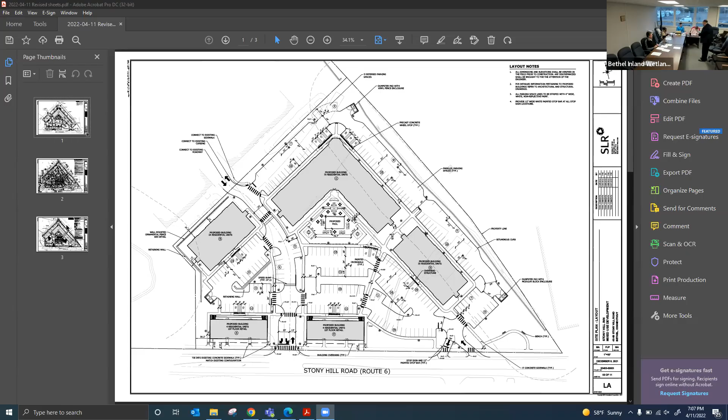Rock Emmond, associate civil engineer with SLR International Corporation. I've been here a couple times now, going back and forth with Wright Pierce on the model regarding the underground detention system.

Previously, we had 3 underground detention systems that were interconnected through a conveyance pipe and underground under-drainage. Based on conversations with Wright Pierce, it was kind of confusing how that water was actually getting from one to the next and how that was modeled. To simplify everything, we came up with the idea of just shoving it all together into one dedicated underground detention system. Because of this, we had to move a couple light poles and a couple trees.

But the actual mitigation is that we're still maintaining the same performance. We're still mitigating peak flows from the 2-year through the 100-year storm. It is still the same technical underground detention system, just consolidated into one area, with the boxes shoved together.

There's one conveyance pipe that goes across the access easement between the properties, which is what we were trying to avoid. That goes to a manhole and then to the outlet control structure, which holds our peak flows. This flat pipe, technically speaking, provides additional detention because it's in addition to the underground detention.

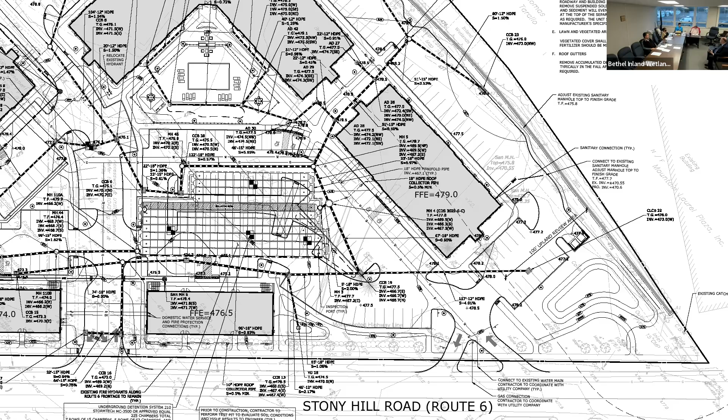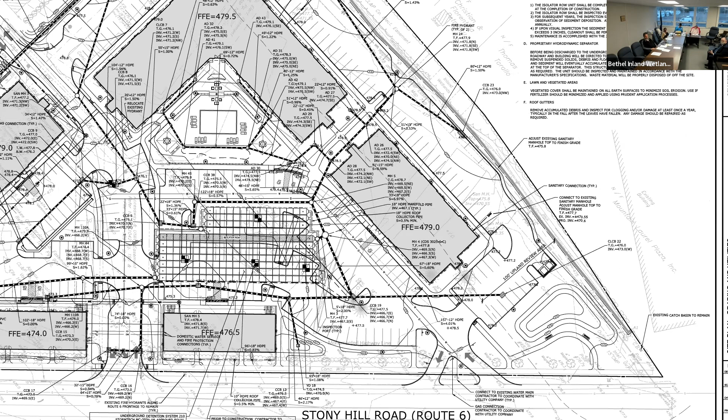Rock, can you just remind everybody where the discharge from that system goes in relation to the drainage ditch? As you know from our meetings, the drainage ditch occurs on the east side of the property. All the drainage is funneled towards the underground detention system, which then discharges to the outlet control structure, and then discharges to 2 conveyance pipes outflowing from the pond.

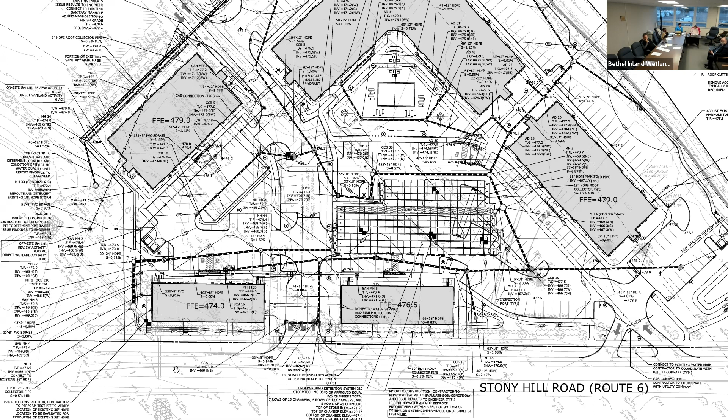As mentioned during the previous hearings, their direction of flow is being maintained, as well as the previously approved plans show the increase or the connection from the previously approved plan. This particular outlet control structure maintains that specific direction and is sized appropriately for conveyance to the concrete structure within Stony Brook or Stony Hill Road, and is then conveyed through a below grade culvert that discharges to the Dibbles Brook.

Thanks, Rock. Yep, so that's all we have. We're happy to answer commission questions, and I see some ratepayers, maybe they have comments or questions as well.

Do I have to sit there, Neil? I'm sorry, though. Yeah, but I wouldn't worry about seating anyone until we're actually in a position to have votes made. Right now we're still in just the exchange of information, for lack of better words.

Dave, do you have any questions before? Not so much questions, more so procedural comments for you guys, and also, I guess, for the applicant.

Yes, as Attorney Olson stated, the memorandum that staff received today was, I'm hoping, the last in a long continued volley of exchanges of comments between Mr. Iman from SLR and our consulting engineers over at Wright Pierce. I think it's worth noting that some of the items the applicant is looking for you guys to address as conditions of approval have remained outstanding since you accepted this application. So it's worth having you guys discuss how we would word those conditions to make sure those items get addressed before any construction takes place.

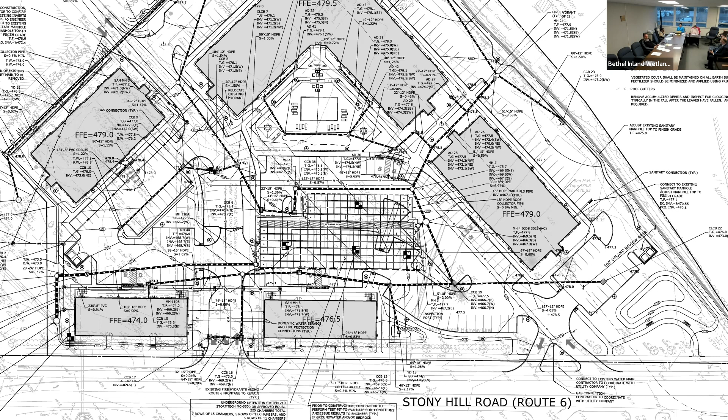We don't actually anticipate, due to best management practices such as the water quality unit and the deep sumps, or just the infiltration row in general, that there's going to be that much sediment collected. But it's nice, it's necessary, and it adds for more variety in maintenance.

So how long does the water stay there? Depending upon what storm actually occurs, we're planning on the 100-year storm, which depending upon the infiltration rates, could take upwards of 72 hours maximum.

So is it going to naturally flush out with more water? It's not going to flush out, it's not pumped out. It's either going to be infiltrating into the surrounding soils, if they are good soil, or it's going to be discharging through the outlet control structure and funneling out towards the connection that comes from the pond that goes to Dibbles Brook.

All right, let me see if I have this right. The water's going to go in there, it's going to hang out there for a bit. And that's what we're calling mitigating peak flows.

So when you increase the amount of impervious surface in an area, that's increasing the rate at which stormwater runoff occurs. So the detention is really holding that water in, like in jail, and then allowing it to trickle out. And hopefully, if you design it correctly, you're matching the pre-existing flows, which our drainage report shows we're showing a slight decrease to those flows.

So theoretically, it's not really going into Dibbles Brook, it should be dissipating out. It should just be spitting it out slowly, but meeting the previous flows.

So if there was, let's say, one CFS that was originally going to Dibbles Brook, we're showing either 0.9 or 1 - there's still that amount of water going there, because you don't want to inundate or take water away from it, since it still needs water to go there. Right, okay, thank you, I appreciate that. Not a problem.

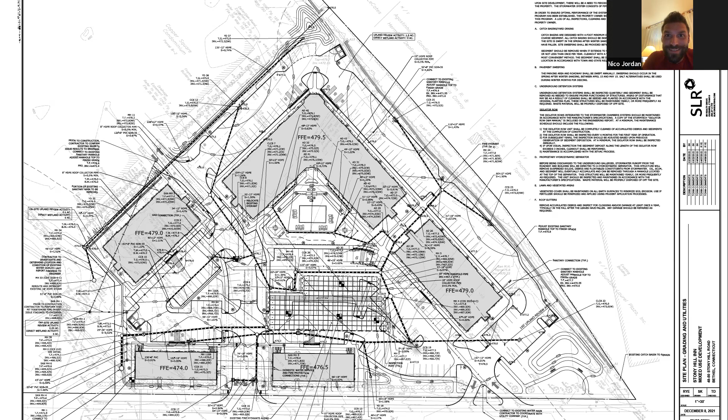The only comment I have, I guess, is just more of a concern for the water quality on the outflow to Dibbles Brook. I don't know if Rock, if you can comment on the quality of the pollutants and the salt content, maybe.

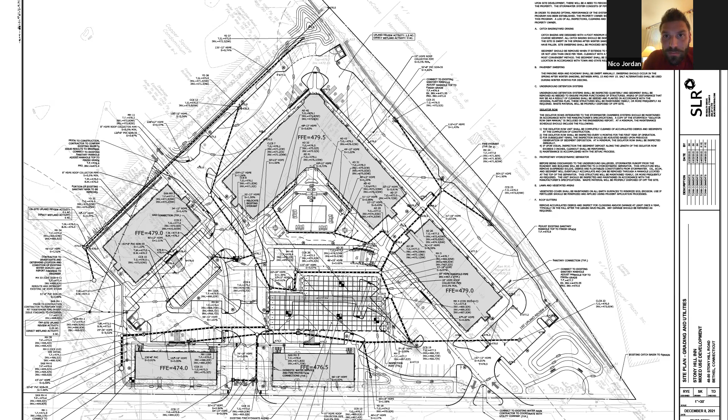So this goes back into the previous meeting as well. The way that we're actually operating the underground detention system, we're both mitigating peak flows as well as providing 1 inch of water quality retention. The water quality retention is handling that first flush, which is handling it both with a water quality unit, which is taking out 80% of the total suspended solids, as well as the isolator row, which I have thoroughly addressed.

Those are actually taking out all the pollutants that you would normally see from just regular sheet flow across a parking lot, or that you would see just ipso facto on a roadway from being salted. So as it pertains to water quality, water coming out of the development is going to be cleaner than it would be if it was not treated. Currently, under existing conditions, as this is both a redevelopment as well as it was originally designed to handle some development of this sort, we are both exceeding as well as mitigating those with best management practices.

That I've just alluded to. Nico, may I embellish your question before you continue? Sure, if you'd like, yeah. Okay, I think, if I'm not mistaken, I think what you're trying to touch on are the methods of treatment, and I think Rock may have spoken to one of those. If I'm not mistaken, there are two separator elements also installed as part of the stormwater management system. Am I correct?

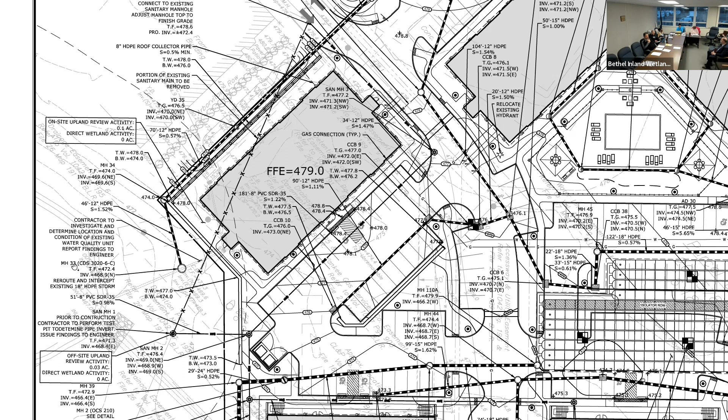So it is sized appropriately for the development at that time. Because we are actually taking water out of that, it's going to provide additional water quality flow, because based on the unit, it increases the size as well as the water quality flow that's going through it. Because we're taking water out, there's still that threshold that's being met, and we're still mitigating it with our own on-site water quality unit.

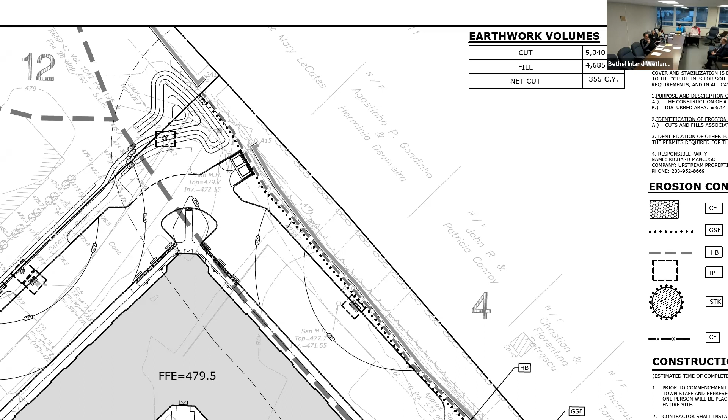The CDS 3020-6-C, yes. And from my own understanding, does that have a hydrodynamic component? That is a yes, hydrodynamic thing. So maybe that's the term I wasn't exactly using. Yes, the water quality unit and the hydrodynamic separator are one and the same. So apologies for the nomenclature. No, that's okay, I just wanted to make sure that element had remained or hadn't. Yep, it has remained, and it's also part of the drainage report that has been reviewed by Wright Pierce. Very good, thank you.

Sorry, Rob, Miguel, just to finish, may I? Yep, go right ahead. Does the hydrodynamic separator take out dissolved solids, like salt? It takes down what's considered the 80% total suspended solids, and those whip around and settle out to the bottom. There's a maintenance program within this document that shows that every couple of years or every 6 months, that'll be cleaned out.

Now, as it pertains to dissolvents, those will settle out inside the detention system as the amount of water increases. It's going to dissipate, dissolve, and eventually either evaporate or just be held and not really go anywhere. So when they actually come with the vac truck, it'll all be within the isolator row, depending on what it actually is. So hopefully it would settle out and then be taken and trucked off.

Okay, so do you think that, considering the best management practices you're employing in this project, that the water quality will be better than the previous outflow to Dibblesbrook? That's the goal, right? I would stand by that 110%. We're trying, even though you're developing all these impervious surfaces and increased parking area, which is going to be salted and added on to with the human use that it gets, that somehow with the construction you're building, are you able to improve the water quality outflow from the existing site to the brook?

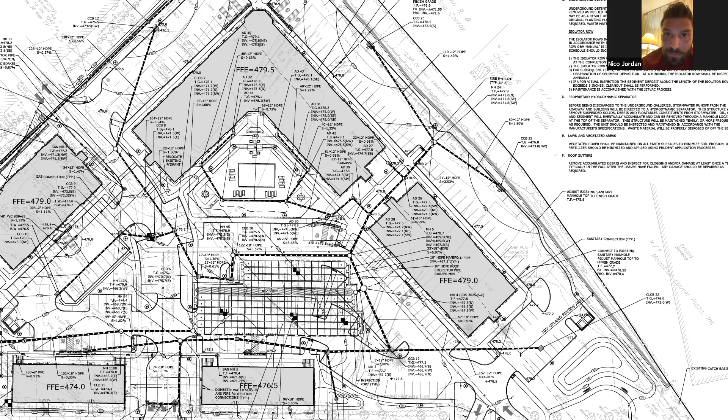That's a huge task. Yes. With the best management practices that we're employing with this project, in my professional opinion, yes. Good, because that's the goal. Is that the goal? That is the goal. That's always the goal of what we're doing here. All right, any other questions, Nico? No, that's it. Thanks. Awesome.

Is anyone from the public here who wishes to speak in regards to this application? I do see someone in the waiting room. Area code 203-482-6410, can you identify yourself? Okay, so I will just say, for the persons out on Zoom attending this meeting virtually that want to offer comment, I believe it's pound 9 or 9 star that you hit. That'll let us know you have a comment to offer, and that raises your hand. I don't see anyone doing that at this time.

So I would say there's no comment. Okay, nothing further from us. Okay, just—

We've spent a lot of time going through this plan. Maybe I should remind you that if we go back to the beginning, we had an approval from 2013 for essentially the same project, and a significant amount of it has been constructed. The property itself is highly disturbed, paved, with former buildings and parking areas and everything else on it. So we definitely believe we're improving the conditions that are out there. Hopefully, when we get this built, we'll bring closure to what's kind of an eyesore at this point.

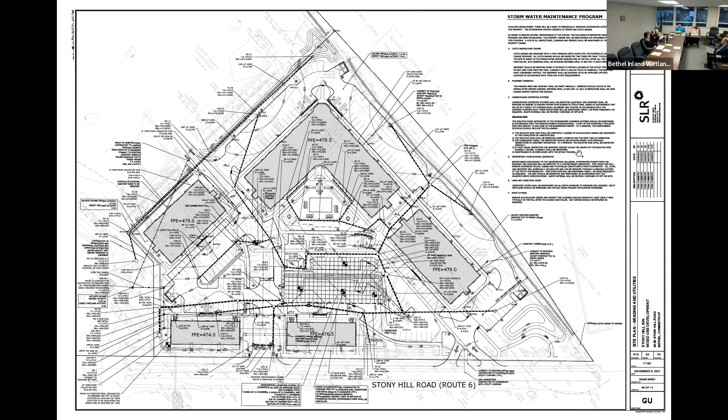I would have you add that Danielle was seated for either Greg or Laura. That choice is at your discretion. Okay, seating Danielle in place of Greg for this evening. Thank you.

Do I have to make a motion to add this to discuss at the end of the meeting? Yeah, if you want to, I would have you or the commission make a motion to add 48-50 Stony Hill Road on the agenda under new business.

I make a motion to add 48-50 Stony Hill Road at the end for new business. I'll second that. All in favor, signify by saying aye. All against, abstaining? Okay.

Next on the agenda, we got Plum Street Road number 49. Is there anyone here for or online for Plum Street? This is a public hearing. Marius Jedrzejkowski from Wright Pierce. Hello, everybody. How are you doing? Good.

Last time we met, we received some comments from Dan McCollum regarding our applications. That was on March 25th. We responded to those comments on March 28th and sent them back to Mr. McCollum, and hopefully he had a chance to review them. Also, one outstanding item was the response from the Connecticut DEP regarding the NDDB determination for the site, which we received on April 1st, 2022, and that was provided to Mr. McCollum for his files.

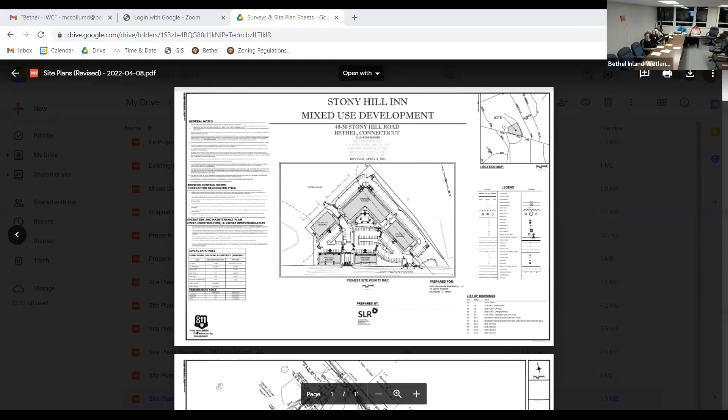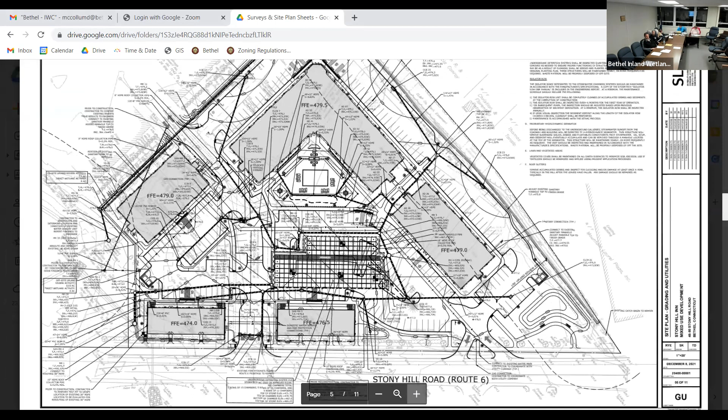So there's the existing conditions, that's what the site plan looks like. Do you have a planting sheet? Yes, I'm trying to find that for you here, just bear with me. See, there's the sheets. That's your sediment and erosion control, these are details. I do know they have a sheet that specifies landscaping.

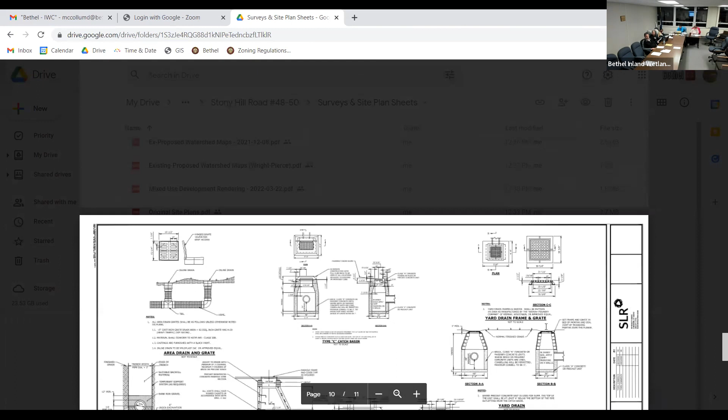Of course, it would help if the computer would work. I'll just go down, unless it's this sheet, the one that's not visible at the moment. Just so we can make sure there's plantings there, to act as a buffer. Which side are you speaking of? The right hand side, if you're looking at the property. I don't know if that's north, along the drainage ditch. Yes, along the north side, drainage ditch. No, that's not the one.

And do we know if they were gonna plant native plants there, or what kind of plants they're planting? We didn't specify. Invasive Barberry. Yeah, great, that's what I thought.

Okay, so while I'm looking for these site plan sheets that'll actually work, what would the intent of these plantings be? What function are you looking for them to perform? To keep things out of the wetland, be it trash and or people.

Okay, so this is litter control and traffic control, people traffic. Like low bush, that type of thing, with lots of thorns. There you go, I mean, you don't want to leave the orange fence there the whole time. So here it is, I would, but it may not blend in too well.

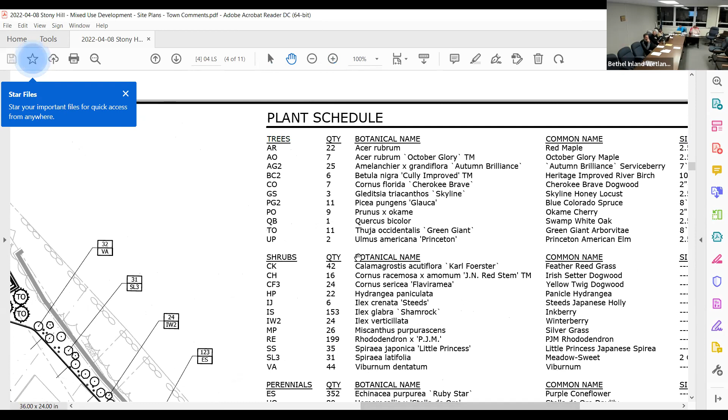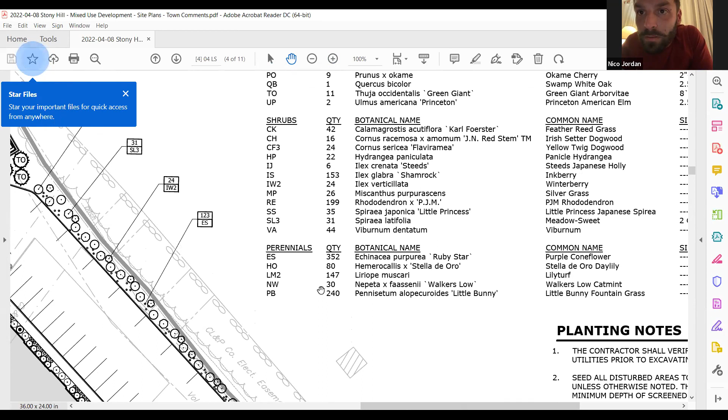Oh, yeah, I knew it. So they have a whole plant schedule, beautiful, dedicated to what they will be planting along the edge of this parking lot area, between the curb and the limits of the intermittent water course there. Great, and the only thing I recognize is rhododendron, so. There's some dogwood trees in there too. Hydrangeas, holly.

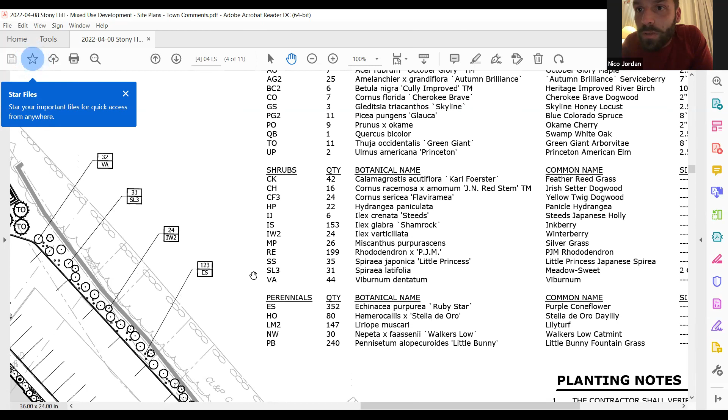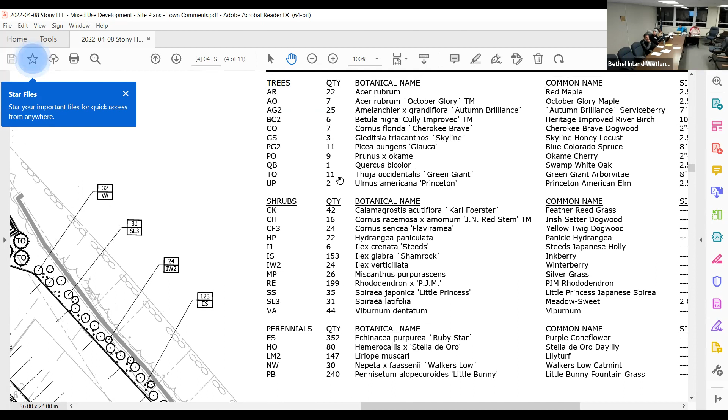Perennial, shrub. So if I'm following the nomenclature for this correctly, you would go by the names and the numbers. So for instance, 32 VA would be, if I can find that here, it's quantities.

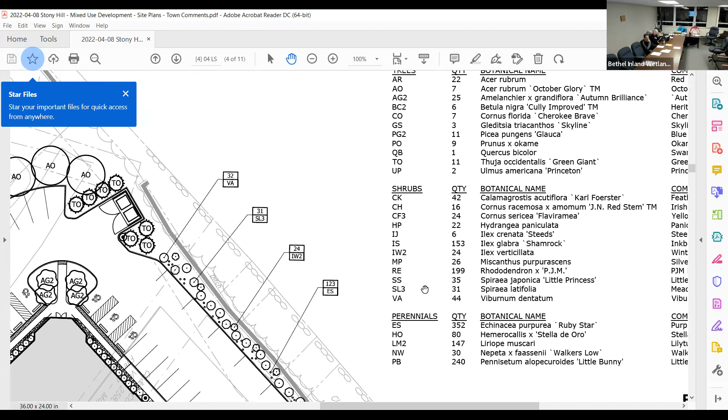Oh yes, okay, that does make sense. So I was going to say, the legend quantity. I see a VA but I didn't see... Okay, so that would be your viburnum dentatum, which is just a viburnum. And then your IW2 would be winterberry, and so on and so forth.

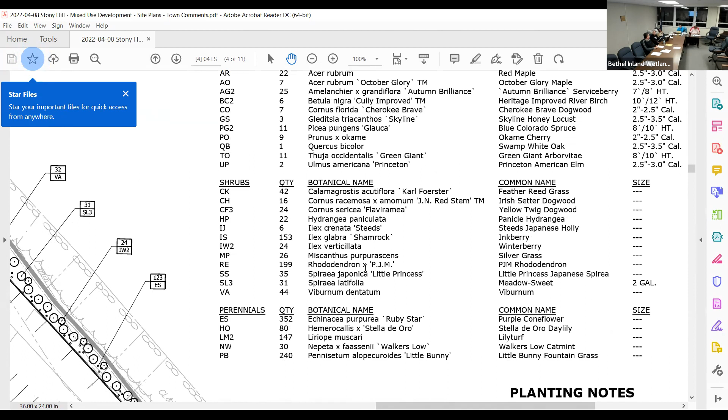Okay, yeah, we don't have to go through each of those. No, that's good. I wouldn't suggest it, I wouldn't know what they are doing anyway. This is great. But I understand what you're trying to do, you're trying to mitigate most anything from the...

You know what viburnums are? They're beautiful bushes with white flowers. They look like hydrangeas almost, but they bunch.

We need a landscaping like this in my yard, this is cool. My only question would be, I'm just curious what percentage of the plantings here are considered native to our region, but I don't know if Rock could come up with that. It's not here anymore, I don't think we could ask.

So that's a question you would have had to have asked during the public hearing. I can calculate it myself though.

That being said, it looks like a lot are native. I'm just curious about the percentage. They usually do mostly, if not all, native. We encourage the use of native species for planting plans, Nico.

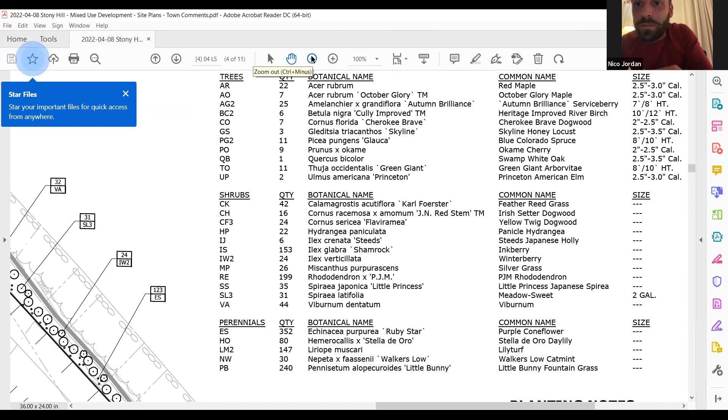I'm guessing it's cool. Japanese holly might not be native, just going out on a limb there. Yeah, some are not. I'm not familiar with the whole area, but of the ones that I can identify, I don't see anything that I've noted as invasive or problematic.

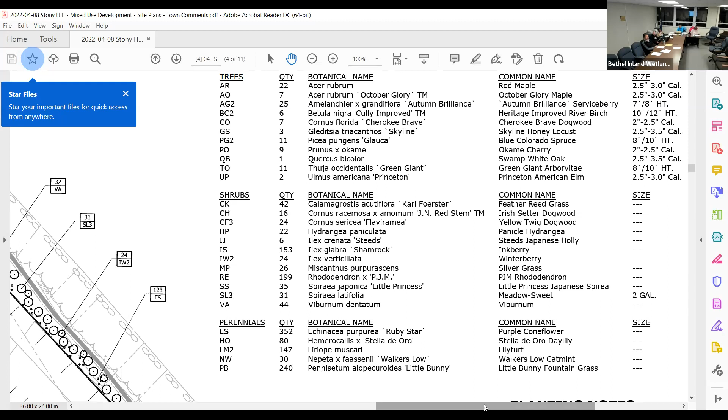Maybe the catmint, that kind of plant goes nuts, but otherwise no. That's a good observation, Danielle. Thank you, I'm glad you're here.

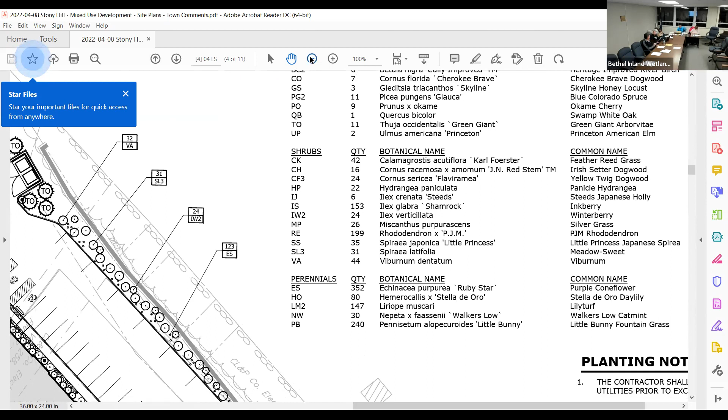All right, that's all the stipulations that I see. I think everything else was fine, but I don't know if anyone else has... Okay, stipulations. And Pat, just as an embellishment for you, you were talking about the dumpster enclosure before.

So it does look like they are proposing plantings in its immediate vicinity, if this is in fact where the dumpster is. Isn't it enclosed? Isn't the back of it enclosed? Just want to make sure. So it has 3 permanent sides, and then it looks like these are meant to be doors that are opened for trash removal.

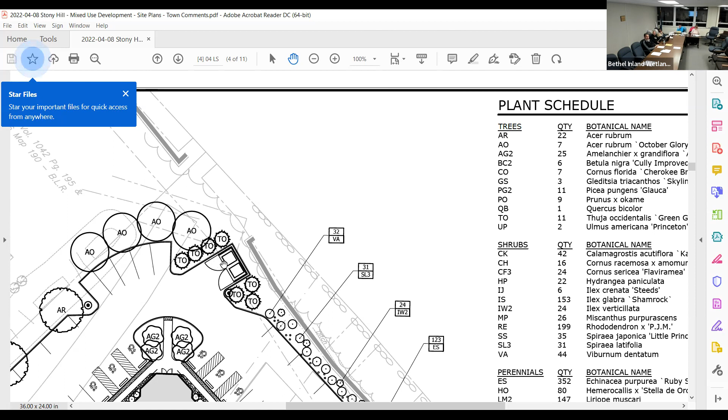They'll break in about a year. Yep, you can give them that one. I mean, obviously you have to have some way for... no, absolutely. Okay, no, okay, that's perfect.

At least the permanent sides are facing the area that we want protected. And then the same would go for what would appear to be another enclosure where my cursor is, down at the bottom of the page, if everybody can see that. There's actually 3 - there's one all the way to the left as well, in the bottom corner. Oh yes, over here, and that's enclosed too. Okay, any other questions?

Not for me. Okay Nico, any stipulations? Oh, it's gonna be pretty cool, I think actually. But I'm looking forward to seeing how it all turns out, I guess.

Okay, so if I have a consensus from the commission, and I would have you all give me an affirmative to do that - to craft a draft resolution of approval for the 25th. Yes, please. Yes, please. You agree, Nico, with that? Same goes for you. Yeah. Okay, very good, then I will do that.

Okay, let's move on to Plum Trees Road. Now for this one, I believe, in acting on your request from the last meeting, I do have a draft resolution of approval ready to go, and I will distribute that to you guys momentarily if I can. There it is.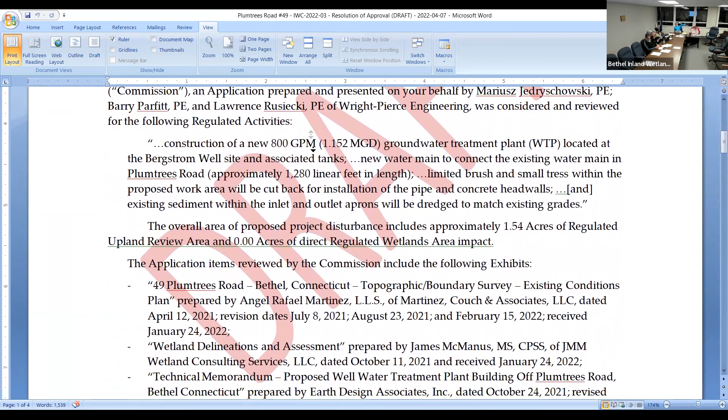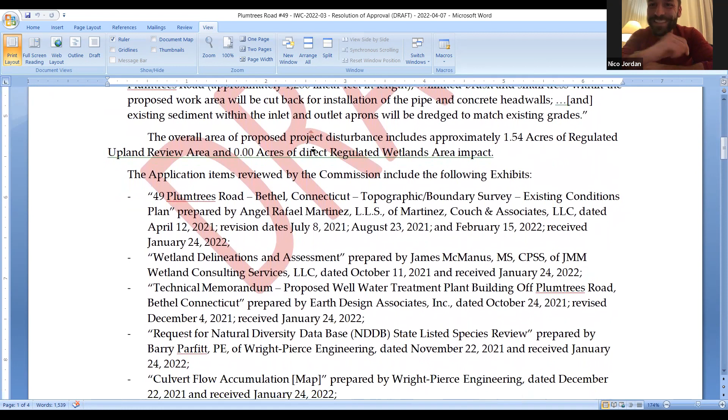Okay, good, all right, so I'll let that scroll. You guys can read, I'll be back in a minute. Bringing coffee, Dave? I don't have a pot brewing, I'm sorry. You could set that to do that. He's very fancy, yes, it's the Star Wars function. Is that really- Yes, it is. So I was just thinking, man, I could do my meetings with that. No, because it would walk away, it gets smaller and smaller. Get my attention there. I'll be right back, okay? Thanks, Dave.

Dun dun dun dun dun dun dun dun. Sorry, can you walk me down too?

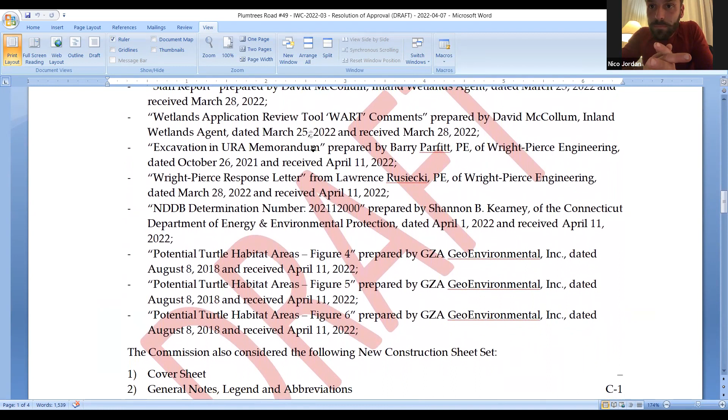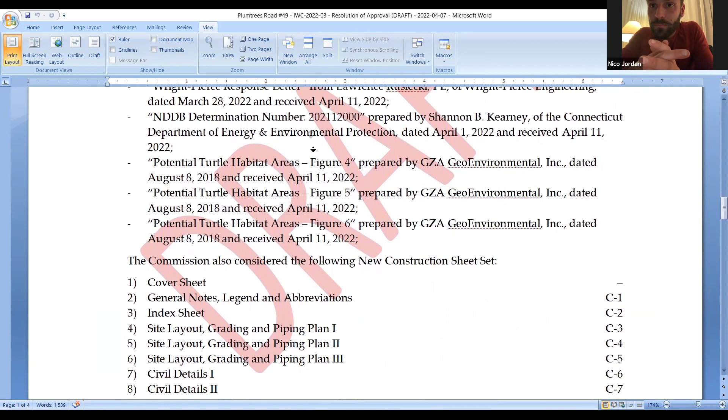Click here, yeah, it's cool viewing tools. And then it's frozen and it's saying, can you get out? You have to call us. You use your computer and just can't get out. Yeah, or it's like exit out. Rather than exit, you click so.

So if you task manager force exit. You did a couple years ago, when that was really bad. Yeah, where you just lock your hard drive and.

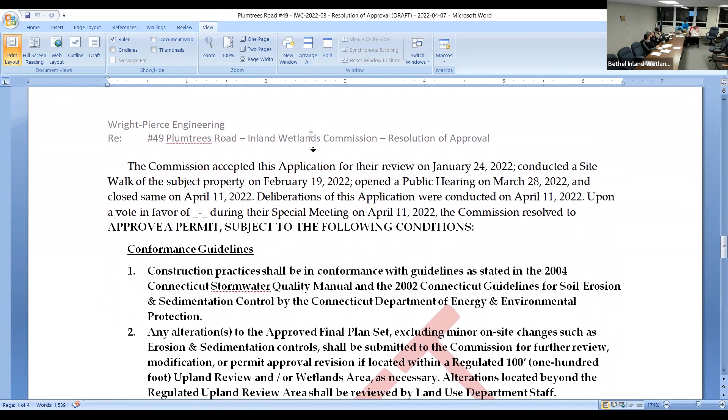Good. Maybe, okay, but I'm the newbie, so I could be wrong. Shit, okay, I'm the old one, I didn't find anything, so. I thought I would, should the turtle person be in here?

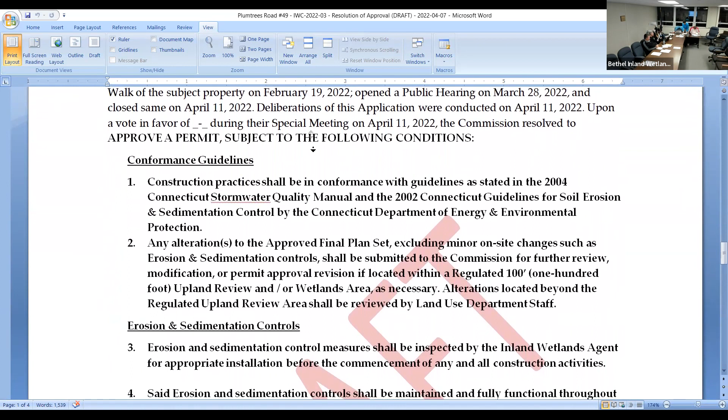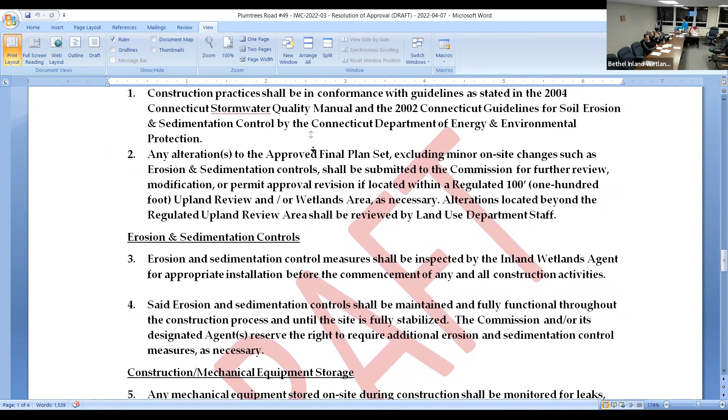Very good, how many points did I get? Infinite brownie points, you know what my prize is? I'm a seated member tonight. Hey. You have a low bar. I do, I do, it's true. That's a gift. No, well, if I have to sit here, at least it's nice to be able to vote.

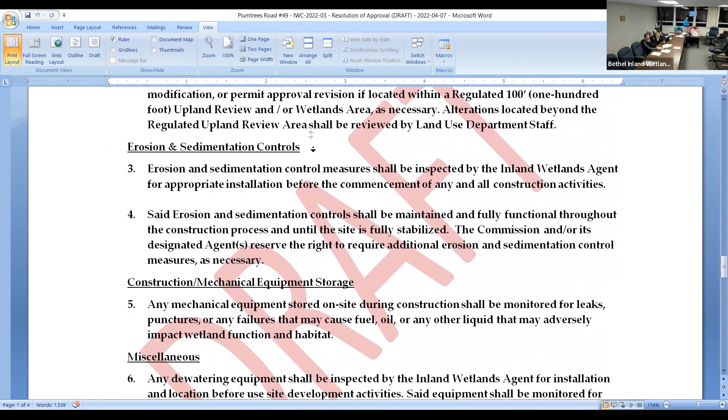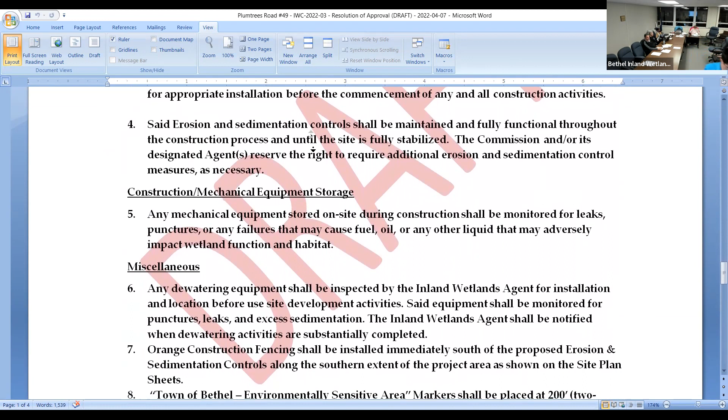It went to Wells Fargo, California. Let's get your representative. No big deal, glad I contributed that. I don't really know how important of a thing that is. It was like, because California is 3 hours behind us, they don't do it. This poor woman would have lost $400,000.

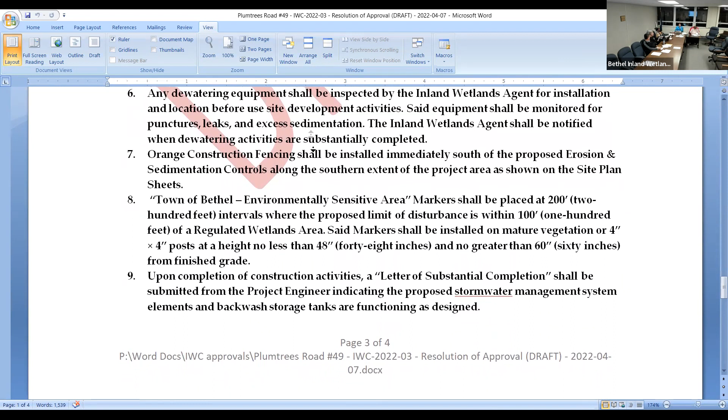No, I thought I read fast until I- No, the first 2 pages are boilerplate, pretty much, yeah, you just skim through, pretty much.

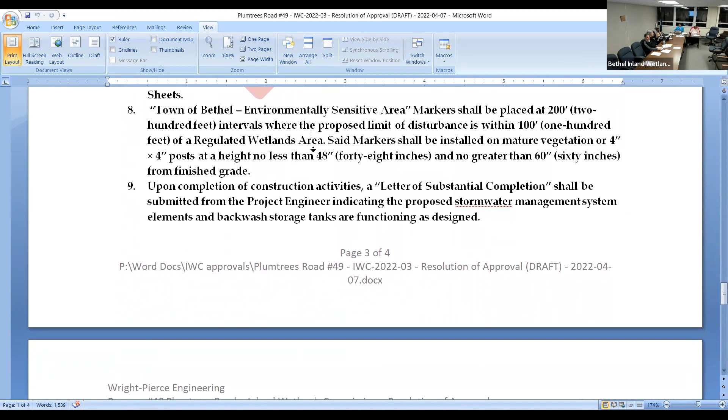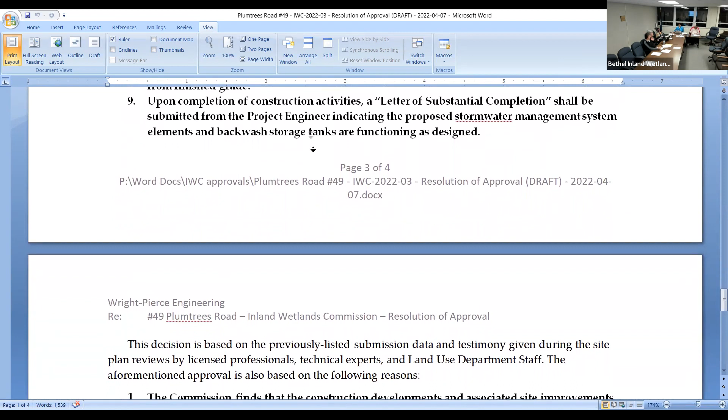Oh, you got the orange construction. That's it. Hey, I found that, I'm good. I saw that, I was like, that's the past clause. That's the fact clause. Actually, I didn't start that, so the previous member started that. Yeah, it is now yours. I think that's a tribute, as an aside, that's a tribute to our former chair.

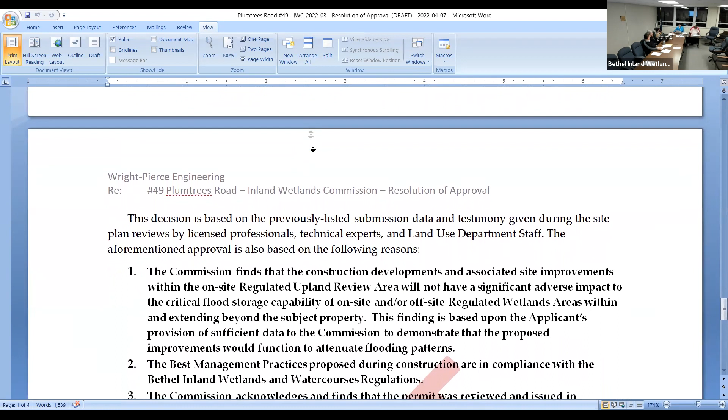Was there supposed to be something here about the culvert that runs through? Yes, and that would have been the location of orange construction fencing. That's another one I also didn't think of, thank you. So I'll have to modify that condition to include those sections.

Got it. Nico, you good? Want to read backwards? A long time ago in a galaxy far, far away. I can't believe I remembered that, to be completely honest.

All right, I'll just go over for everybody what you all read on the screen. So as Pat mentioned, the first two pages are really boilerplate. They describe what it is that is before you guys, which is the construction of a new 1.152 MGD groundwater treatment plant located at the Berkshire well site and associated tanks.

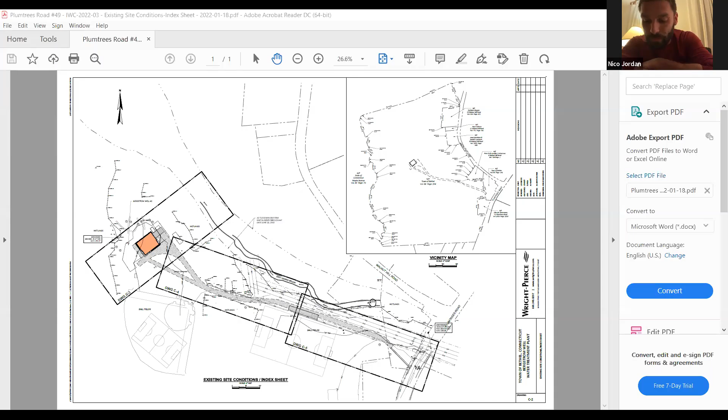It doesn't have to be every tree. If you have a tree at 150 feet, that's fine, or 210, that's fine. You could make it a range, like 150 to 200 feet, as nature provides, at natural intervals, depending on what the site kind of asks for, if that makes sense.

I like it. Can we get some tinsel? I like tinsel.

Let's work this from the entrance off of Plumtrees Road to ultimately where the Bergstrom well pump station would be. So this is your existing driveway entrance here, right? You would have them installed to the effect of, because they're going to be putting the water main in to get to Plumtrees Road, so my thought process would be you would have them installed along the edge of where that cleared area is.

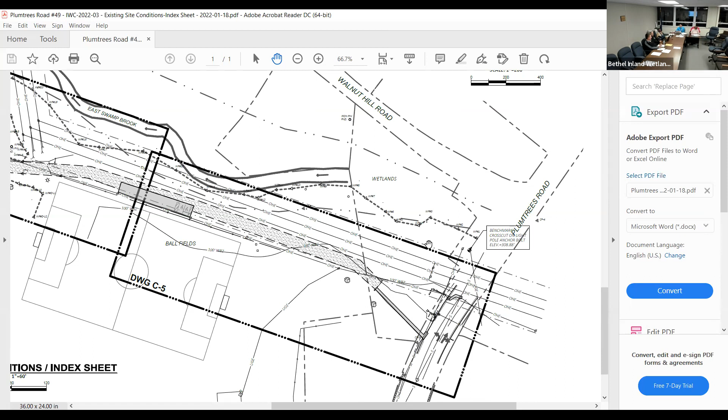As long as it's not in the middle of it. No, as long as it's right on the edge, we're good. That would be the thought process, and then you would have that extend all the way down to the back of the pump house here.

This is where people are going to be spending an extended period of time, either getting ready for games or socializing before and after, so most of the hanging out with strollers and bottles occurs in front of the pump station. So this would be where it would be most important to have a visual indicator for people, I would say. So if you're comfortable with that interval and think it serves its purpose, that's what my intent had been with crafting it that way.

That's fine. And if for some reason the contractor, when they look at this resolution of approval, doesn't get it, I'd reach out and show them what I need. That's fine, and I'll show you guys what the intent is.

Is there existing mature vegetation along the driveway on that side? Not really, it's mainly just reeds. Right, so that's the thing you may have to meet with your 4x4, because if you have phragmites there, that obviously wouldn't work. So that's where having the posts would make sense, and I would only have those used as a backup. Does that make sense?

Yep, it does. One other thing, I just noticed from the recommendation sheet there's no indication as to depth below ground level for the fencing, it just says to ground level, 20 inches high to ground level. That was my concern, was digging, turtles dig under, so it'd be very easy to get them in. I don't know if we're able to make it a stipulation that they go at least an adequate depth below ground.

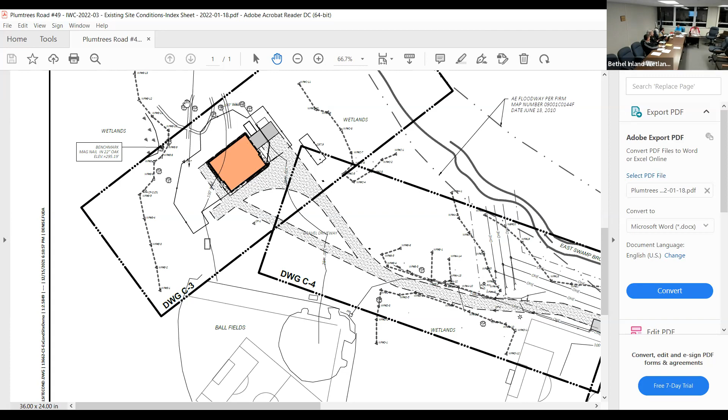Deep. Amend construction fence orange to include culverts. And then I have to add in the APA regulations section.

Okay, anything else I missed, guys? Nope, not for me. Nico, you good? I should have been writing while I was - yep, I can't multitask that well. So I would say you have... oh yeah, you know what, let's just put that as a second one.

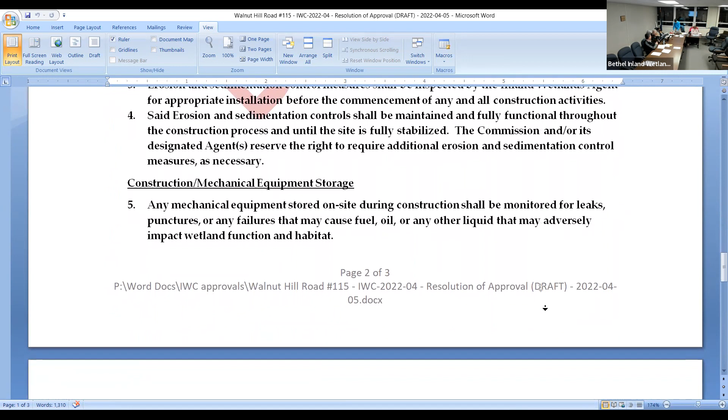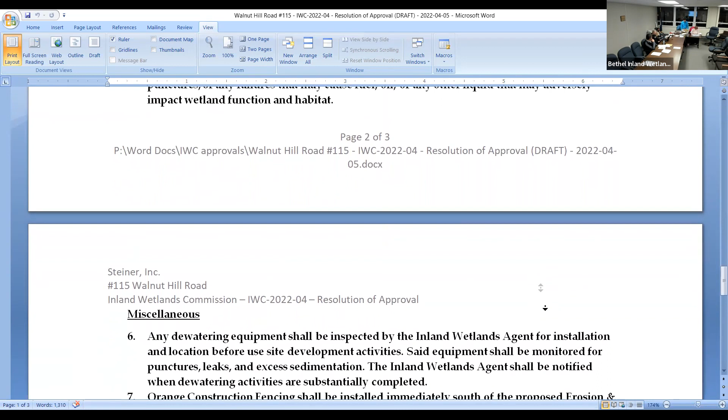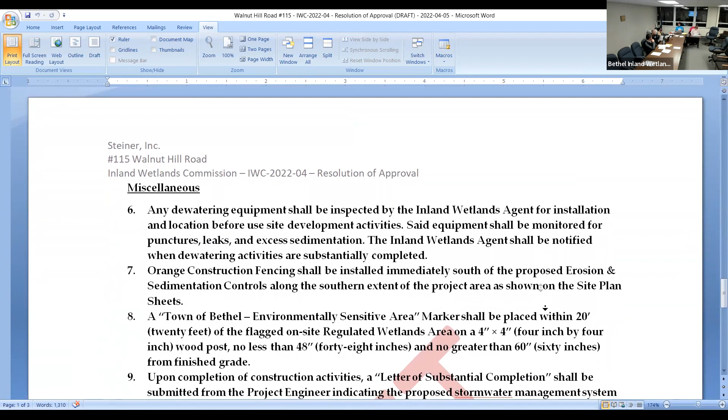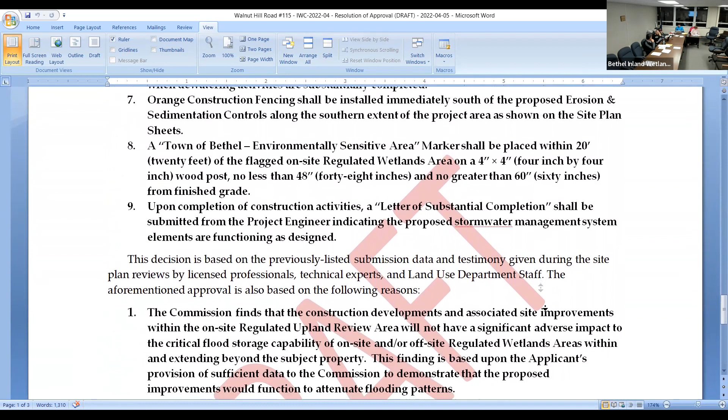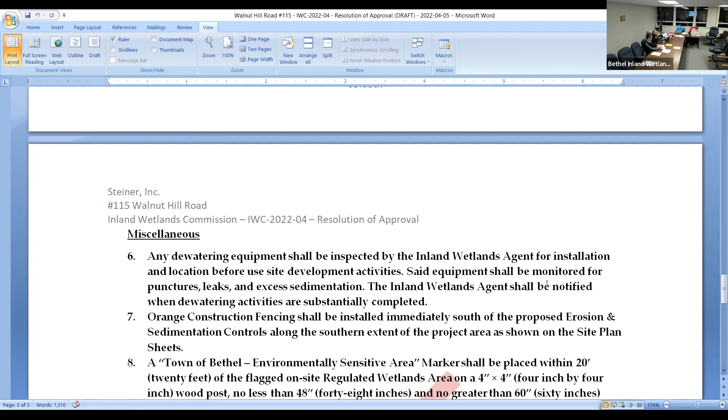Okay, so if you guys haven't already surmised, a lot of what was written in the approval that you just saw and approvals you've previously seen are here again. Of course there are tweaks I need to make, the obvious ones being adding a blurb about the aquifer protection regulations. You guys are rendering a decision in consideration to those, because this also falls in an aquifer protection area. And then the other item being the markers again. So obviously we would not have.

Okay, so I did read it the same way. So if you guys are comfortable with having just one, or if you guys feel it's not appropriate to have any, I leave the decision to you. We can strike that, I think one is fine. You're not telling where to put it, they could put it on the side, they could put it in the middle. It's within 20 feet of the regulated wetlands. So you're not telling them to put it in your view. I mean they literally can have it to the side. Okay, I'm fine with that.

It says placed on a post. I don't know if you want to be on mature vegetation. Mature vegetation, okay, is that okay? That's if there's a very good freestanding tree right where they can plug it, if you guys feel that's appropriate we can certainly modify that condition for that. I mean I would like to add that, would you guys care? No, that's perfect, yeah I agree. Okay, no I think that's fine. So let me.

And you can change it to a minimum of one, because if they want to put more than one, that's fine. Yeah that's true, if they wanna put more than one we shouldn't tell them not to. No, you guys shouldn't discourage them. I would add that there's no cost for these markers either, because they may go on the other side and put some of their own woods there, so. Okay, a minimum of one, that works.

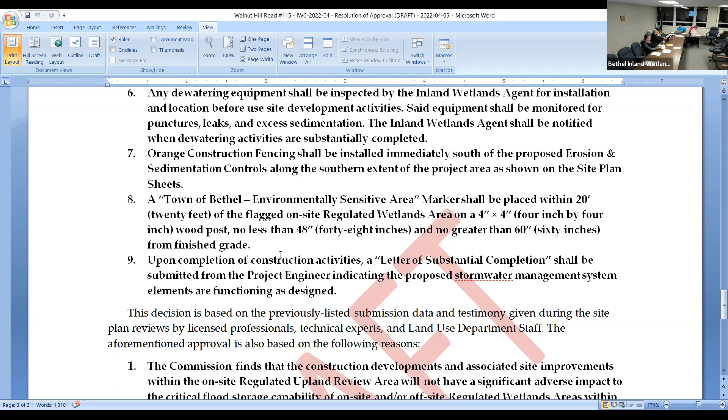Okay, and reasons for decision are pretty straightforward as well. They are the same ones you guys used for the previous application. I can modify these as you see fit, unless you don't think any modifications are needed. I don't see any. Okay, cool.

So we just need a motion? Yes, would you like to do the honors? I'd rather have someone else do the motions. I make a motion to approve the draft resolution of approval for 115 Walnut Hill Road with the 9 stipulations as mentioned, with the amendment to number 8 as discussed this evening, alongside the 3...

And these conditions of approval are based on the findings as listed 1 through 3 on page 3 of the draft approval.

Yes, and we have a second. Second. All those in favor, signify by saying aye. Aye. Aye. Against? We need an aye from you too. He's got thumbs up, okay, aye. Thank you. Abstaining? Motion carries. Okay, very good, and we're on to the next one.

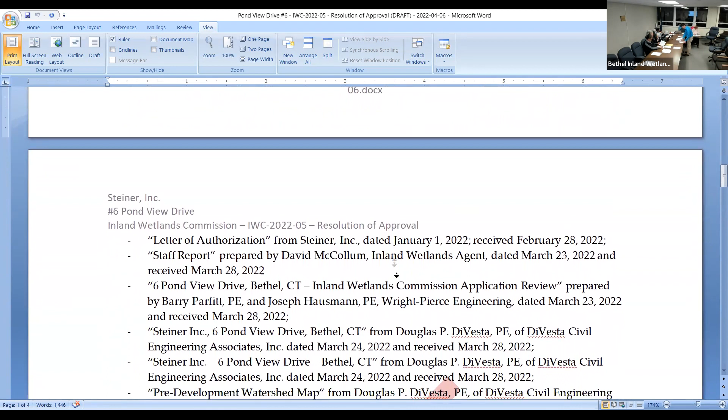Just change the letterhead on this one, Dave? Some of the nitty gritty it takes, yeah, it doesn't seem like it's obvious, but there's a lot more that gets changed than meets the eye. I'm sure, the whole first couple of pages, I don't know how you track it all.

We're done here. Let me tell you a funny story about not editing documents like that.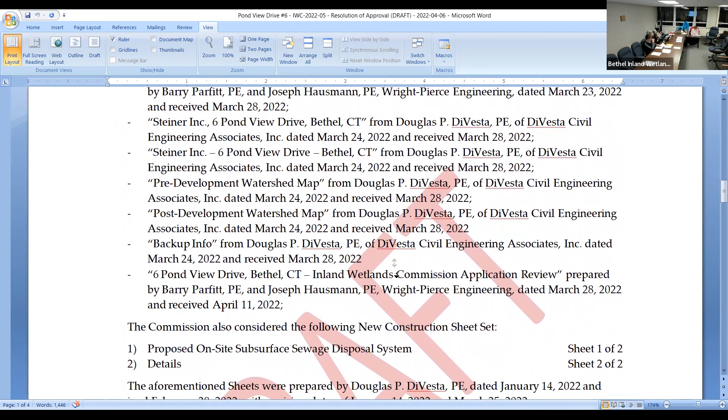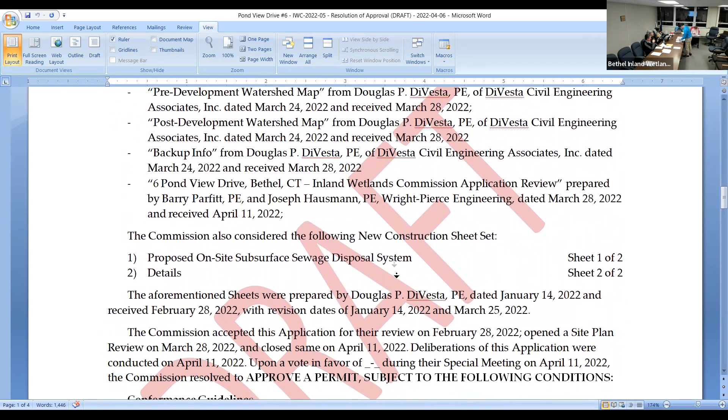If they could put this on a Bethel marker on their front door.

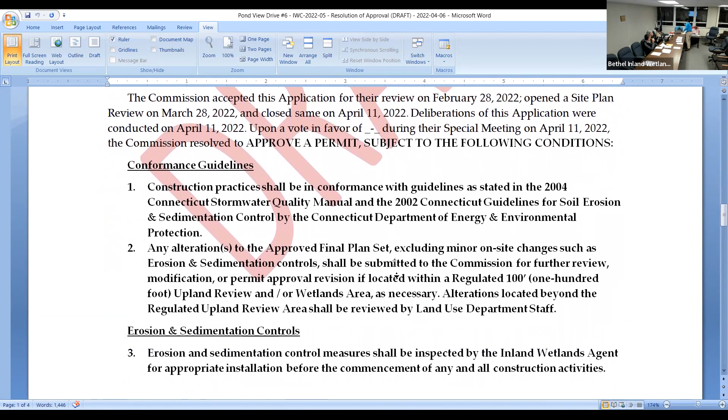If they're fishing that pond and they catch something, I'm gonna be really upset, so I wasn't gonna fish in that for 2 years. No bites? Nothing really, but we've seen them though, we've seen them in there.

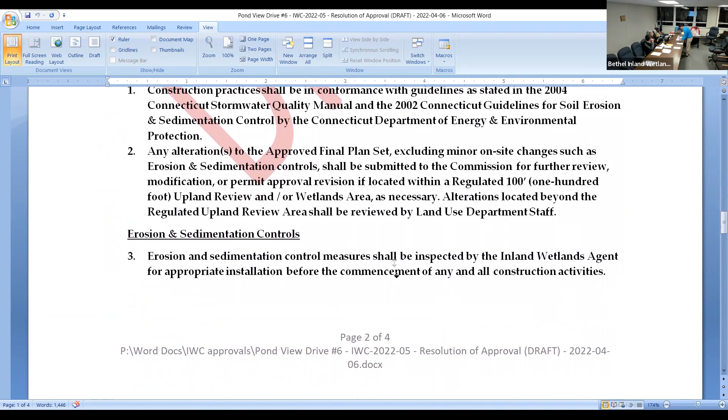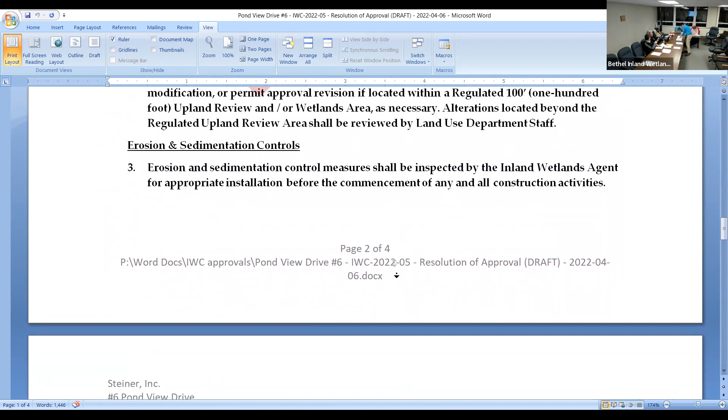My brother has a homemade pond. It's good, you can do a canoe on it. It's huge, and people come fishing all the time, only catch and release, unless it's some type of fish that's like this big, that's not crappie, usually. Yeah, but they can take the rest, they just got some big fish in there. Well, you don't wanna eat largemouth anyways. Oh, I don't know, well, I mean you can, but they taste like garbage fish. Largemouth and smallmouth, they just have a weird taste to them because their diet is so wide, it's like a wide array of food they eat.

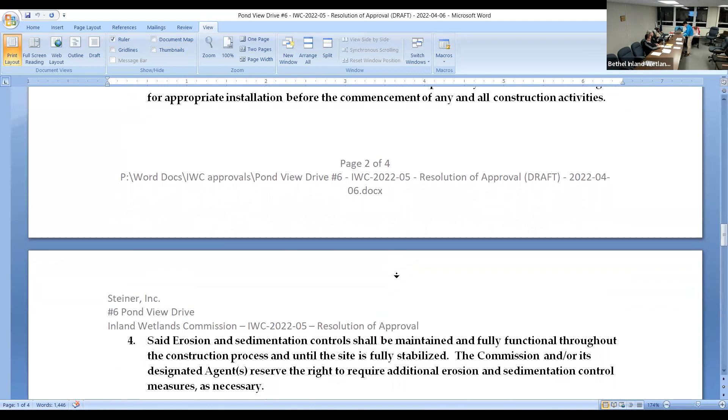Yeah, really, for fish I think deep sea fishing, that's it.

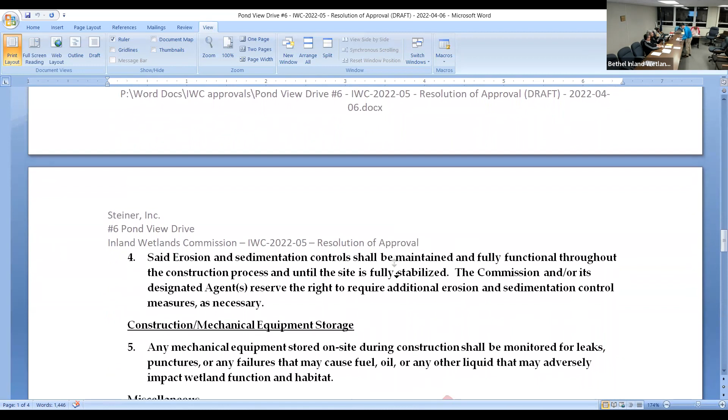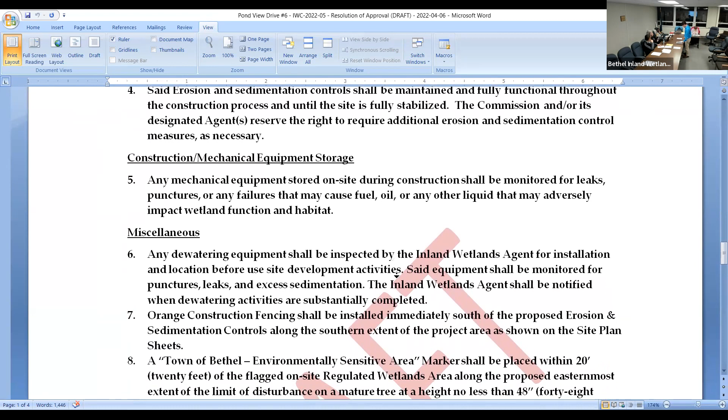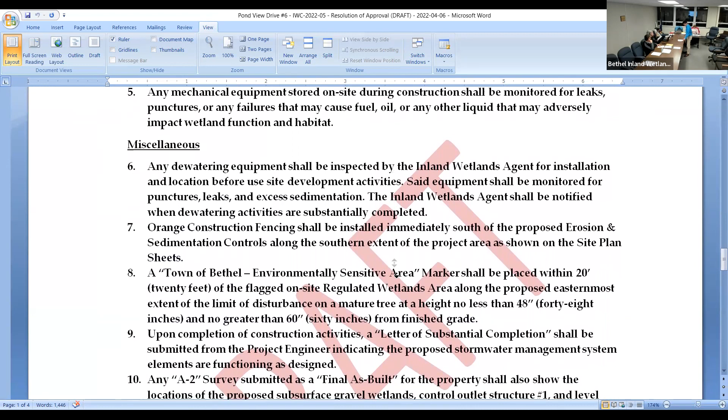So I swear to you, there are no fish in the Huntington ponds. I watch them stock it, I've seen people pull 1 or 2 fish out of there, seen one swim by, but out there 50 times, not for a damn thing. I was out there this weekend and saw somebody walking out with a haul. Maybe it's you, or did they stock it again? Did they stock it, you think? I don't know, people show up the day after they stock it, pull all the fish out, take them home, cook them, and leave nothing for us. Yeah, Carluzzi's has some you can pick up.

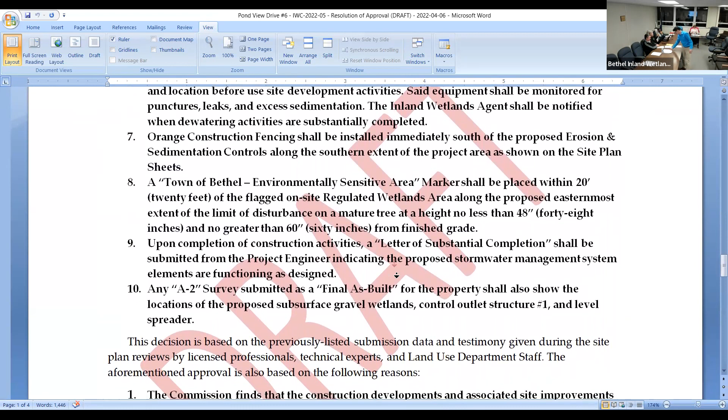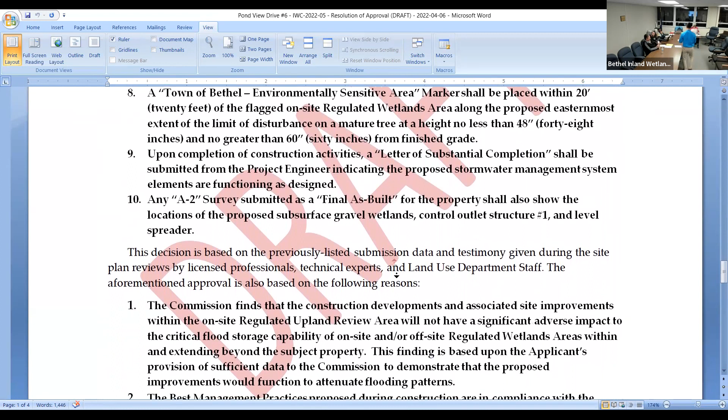That's what I had to do. I caught a big bass once, Kevin, in the Huntington Pond, the smaller of the 2 ponds. Are you serious? Wait, like the one at the bottom of the hill, or the one right when you walk down? The smaller of the ponds, to the north of the bridge. Okay, I know what you're talking about, like the smaller of the 2 ponds. Yeah, I was gonna say, it sounds like we were done before we even began. Yeah, I got it, well it's pretty much the exact same. I pretty much swear it's like fishing for unicorn when I go there.

I think we have to change number 8 because we gotta update that again. Yes, yep, to do the same.

Outside of that, I didn't find anything. Everything else is really answered. I asked a million questions.

I think, should we put a stipulation? I'm trying to picture how close that house was to the wetlands. It's on the wetlands, it's close. Can we put a stipulation on there, no clearing in the wetlands, or is that just covered by the town? Well, that's a regulated activity, that would be something that would require, I'm not sure.

Let's just picture 10 years down the road - a gentleman sells the house, someone new wants a backyard, goes in there, and there's no orange fence, just a bulldozer. You get your backyard, little shields and all. You know, I don't know the property well enough, but if it's similar to mine, you can't clear down there because it's waterfront or mudfront property.